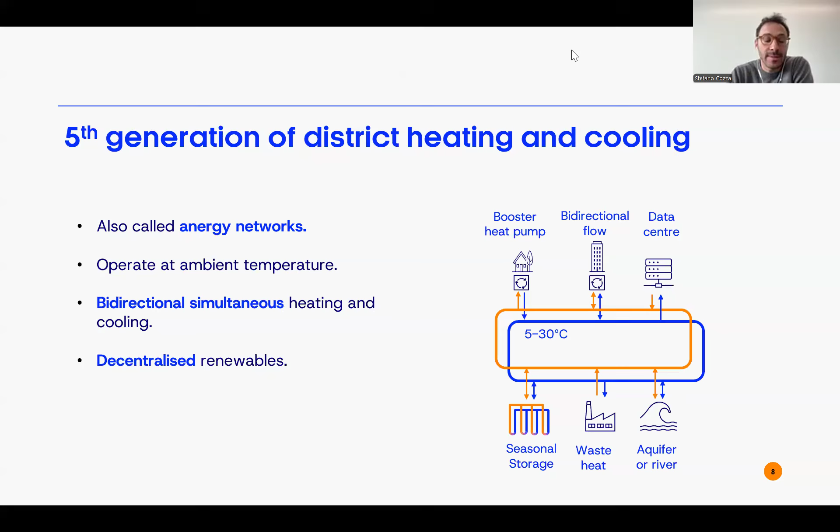anergy networks or low temperature networks that can work at ambient temperature, can provide heating and cooling, can use different amounts of renewable resources with seasonal storage, waste heat, water, data centers, really integrating different solutions to provide heating and cooling to the buildings. And this is a solution that we see developing very fast, or at least a bit faster than, let's say, classic big district heating projects.

This is because these networks are a bit smaller and give the possibility to really use local energy resources that are specific to every place. And they can connect fewer buildings, so they are able to overcome a lot of the classic problems we have with big district heating projects in cities, in which we need to close many streets, connect many buildings, and need a lot of financing to make it work. So it's really a solution that can work and is working very well for many European cases.

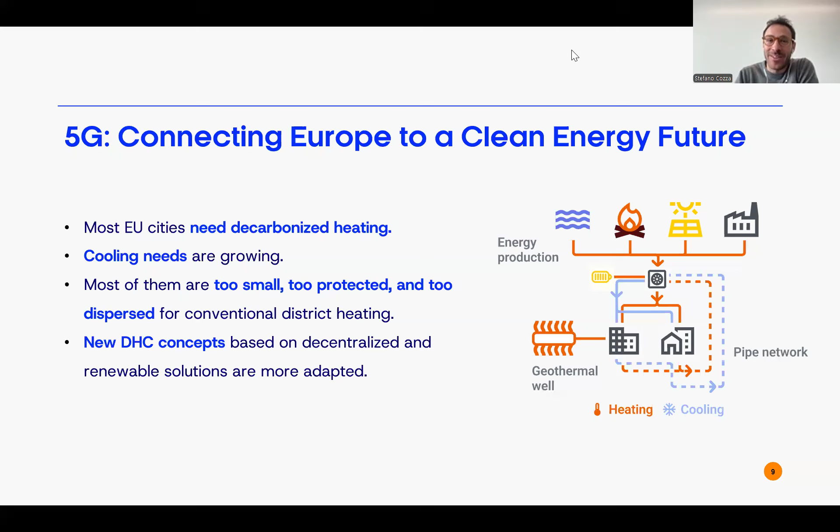So it's a solution that seems the dream one and that could be deployed very easily and very quickly. But of course, it also comes with many challenges: with all this increasing efficiency and more renewables, the more complex the networks are, the higher the challenges. So we need to better identify the building demand. We need to better identify the supply. Renewables, as we know, are not always available. Buildings are all different. So all this comes with a lot of challenges that can be partially overcome with software and digitalization.

So the focus of our work is really to bring digital tools and digital solutions to overcome many of the technical challenges engineers and planners are facing when designing district heating networks. And this is also why we developed, as Ivan was saying in the introduction, our software TESSA, the Thermal Energy System Simulation Assistant. TESSA is a software that we started developing almost 10 years ago at the University of Geneva with my two co-founders and colleagues, Jonathan and Xian.

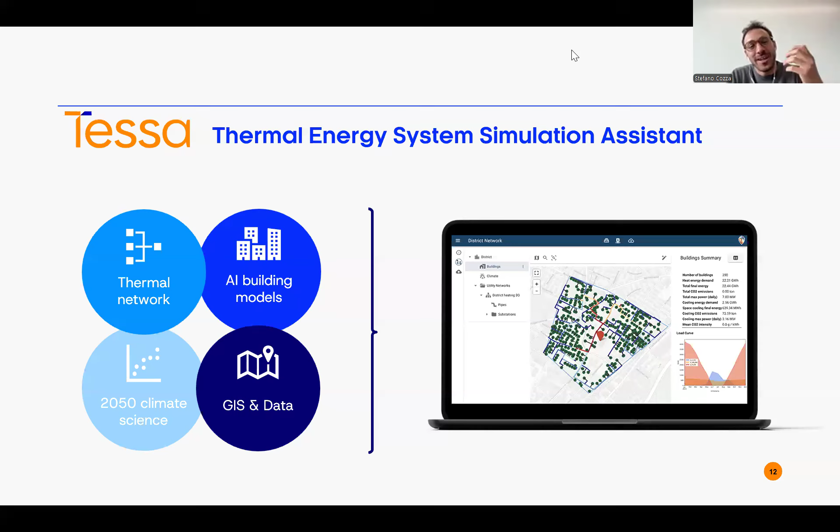We were all working on different topics of energy efficiency. We were working on thermal networks with algorithms to cluster the buildings. We were working on energy models. We were working on climate science and climate scenarios, because we are building networks now that are going to provide energy for the next 50 years, and the climate is changing. So we need to take this into account. And we basically brought all this into a software easy to use for engineers, to bring all these years of science and research into the industry and give them the tools they need when planning district heating.

And these are all the things that today we can cover with digital solutions, and many of these steps are still done with Excel, even with PDFs or manual inspection: starting from the demand, so how much the buildings are consuming; source identification, so where is the heating and cooling we can provide to our buildings; the design of the system, so the pipes, where these pipes are passing, the streets, how to connect the heating to the building; simulation of the system; and finally economic assessment, because in district heating the CAPEX and the return on investment of a network is really the main challenge, and what is probably blocking most projects today.

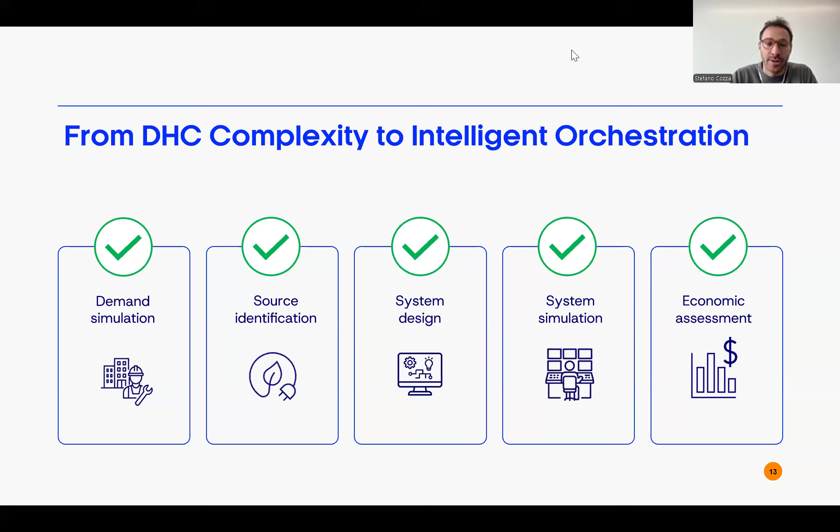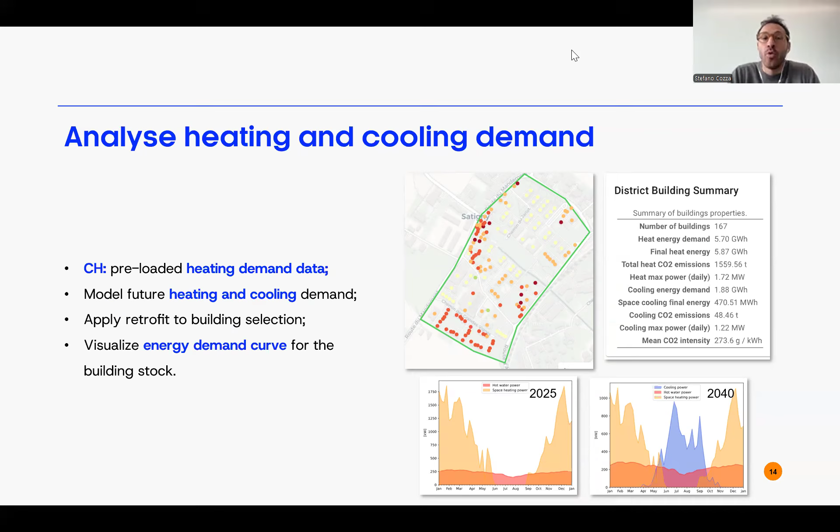So we cover all these aspects in one place, in one SaaS, one software that is easy to use, starting with analyzing the heating and cooling demand, for which we have data already available for today's climate scenario and future scenarios. I'll present a little case study later with the increased demand for cooling. So how to take into account in a network of today the new cooling needs we will have in Europe.

Generation of the district heating network: automatically generate the network, see which are the optimal routes and connections between one heat source and multiple buildings, and dimension everything you need with it, energy storage, sizing the pipes, calculating the pressure, sizing the pumps, really everything that you need at the design level.

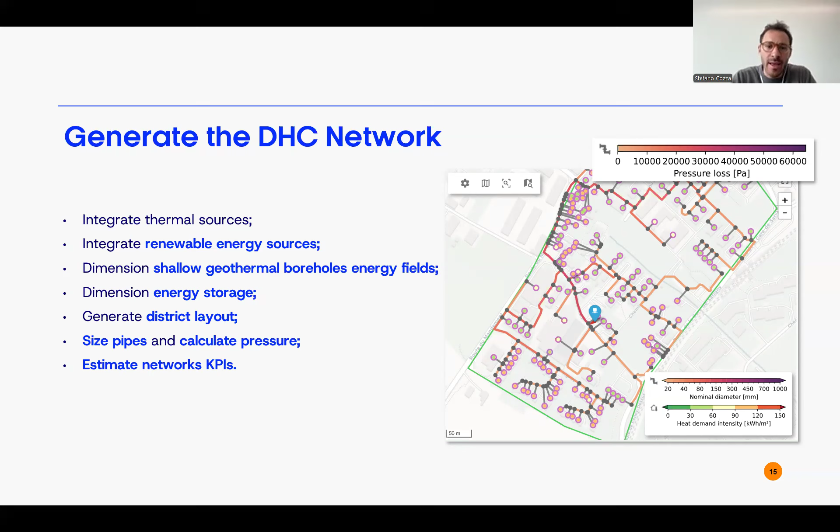And then also, of course, generate the output of this analysis, generate scenarios that can quickly be compared and have the most important KPIs for each of these projects, as energy savings, CO2 savings, capex, and so on, and be able to really compare very quickly different scenarios and be able to decide which of the design scenarios is more suitable to a certain project or a certain place.

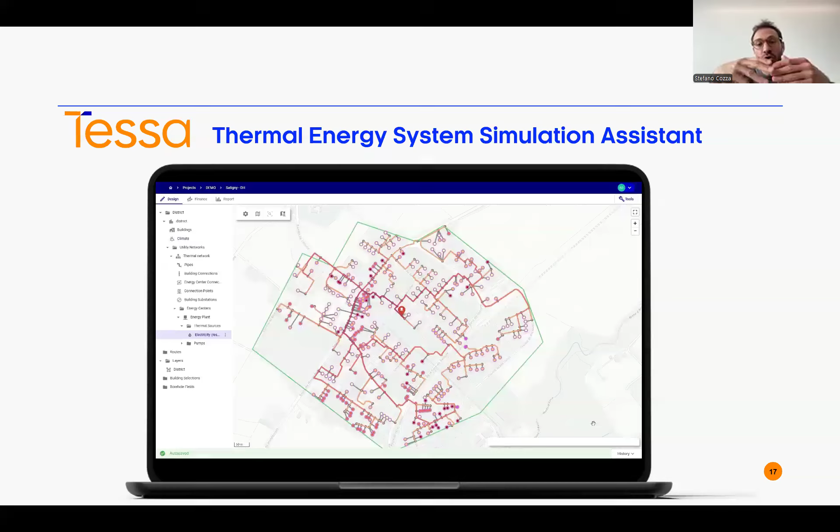Here I have a little demo that I did this morning, a recording of a case here in Geneva, to really show you a bit in action how far, let's say, we can go today with digital tools when designing networks. So this is an area close to Geneva, Satigny, a village that we can see from my window now. We can really select an area and quickly see all the buildings that are in this area, generate a network that connects all these buildings, and quickly generate a scenario

in which we can see what the district is today and how it is going to look once we connect all these buildings to district heating, in which we can decide very easily the heat source that we want to use, or multiple heat sources. We can start to play, remove buildings, add buildings, make scenarios, make hypotheses. But all this allows us to very quickly arrive at this kind of result, in which we can really see what is the cost of the kilowatt hour, the total investment, and a breakdown of the different items.

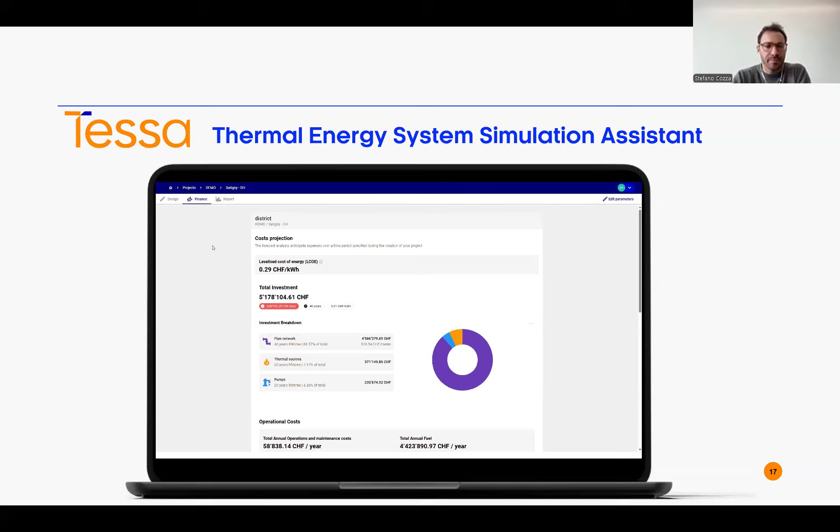I would like to present you a case study, a project that we did recently, that has been awarded here in Switzerland with the Infrawatt award, that is really on innovation and replicability. So I think the added value of these new smaller 5G networks is how we can replicate them and scale them. This has been so far a bit the problem of district heating. Each project was a standalone project, very big, very unique, and despite learning a lot of lessons, every project was very different, very difficult to make of this an industry that could really scale and be replicated.

With 5G, it is instead really going in the direction of a technology that is really turnkey. You can really start from the beginning to the end and have something that is replicable in different places. So I decided to show you this case, because I think it's something that would speak to a lot of you. The case was a typical Swiss village, that is not only a Swiss village, but could be a typical European village. So 67 buildings, all with 90% fossil fuel. There were just like 2-3 heat pumps here and there, most of it oil and gas, very dense with very few streets,

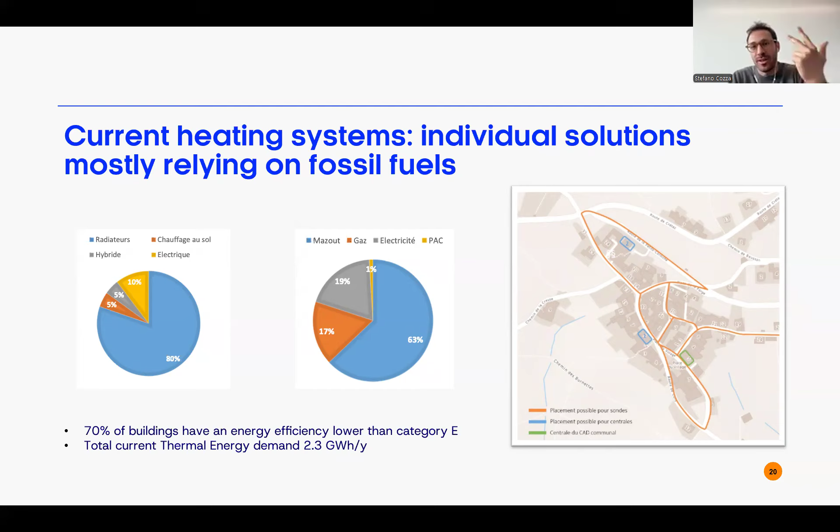impossible to put a heat pump everywhere. They explored different solutions to decarbonize heating and cooling. It is a protected area because it's a village that is UNESCO heritage, so also very complicated to change the buildings. And a context like this was heavily on fossil fuel, with a very low energy efficiency label for each building. So old buildings, inefficient, with fossil fuel, a classic.

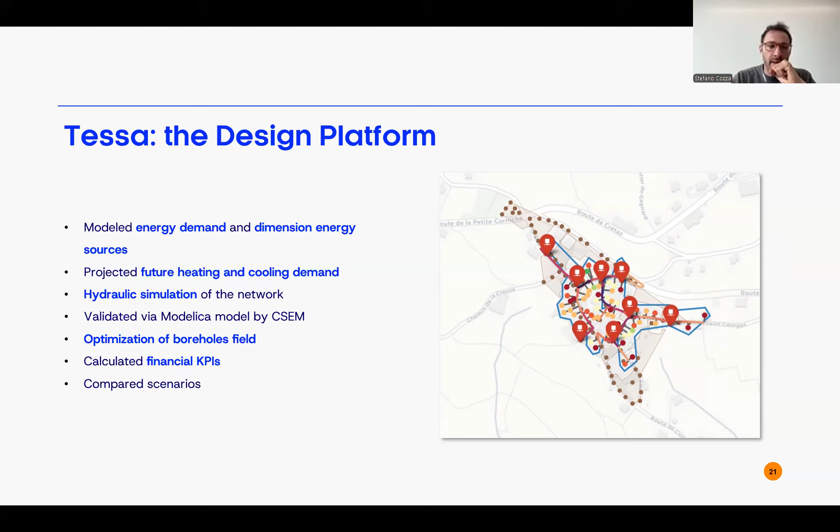And in this case, the engineer that worked on this case was able to use our software to really come up with an innovative solution to use all the possible energy sources they had in the village. So really extracting heat from the parking, a little river, ground source heat pumps, geothermal probes. So to really be able to use different sources all at the same time, all in a network that with low temperature was able to provide heating and cooling. And taking into account also climate change.

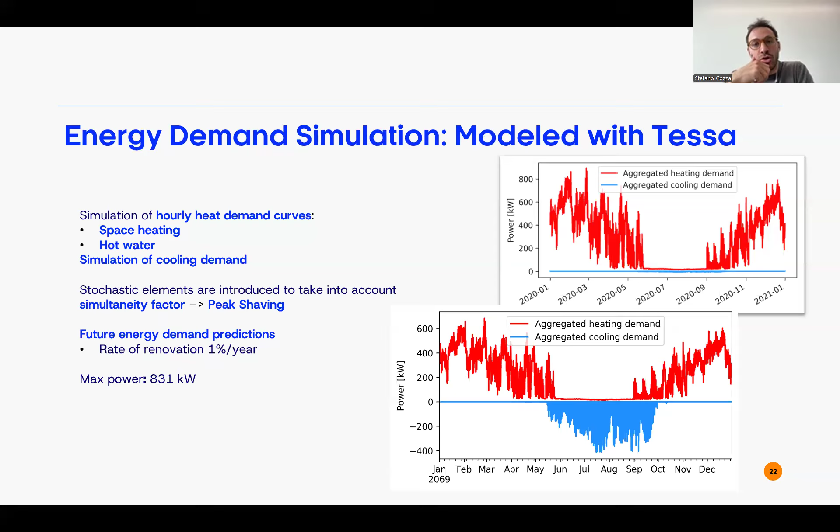So this village, actually all the area of Lake Léman here in Switzerland, is really affected, like many other places in Europe, by heat waves and how much the climate is changing. So the need for cooling is really growing very quickly. And he was able to simulate and show what this demand for cooling is going to look like in the next 40, 50 years, and show also how the renovation rate of the buildings is going to count in this new network. So a really, really advanced tool for this case.

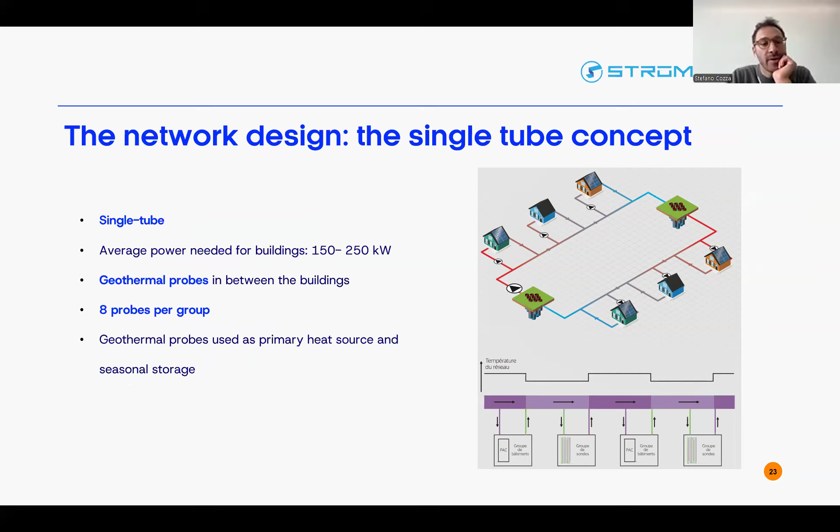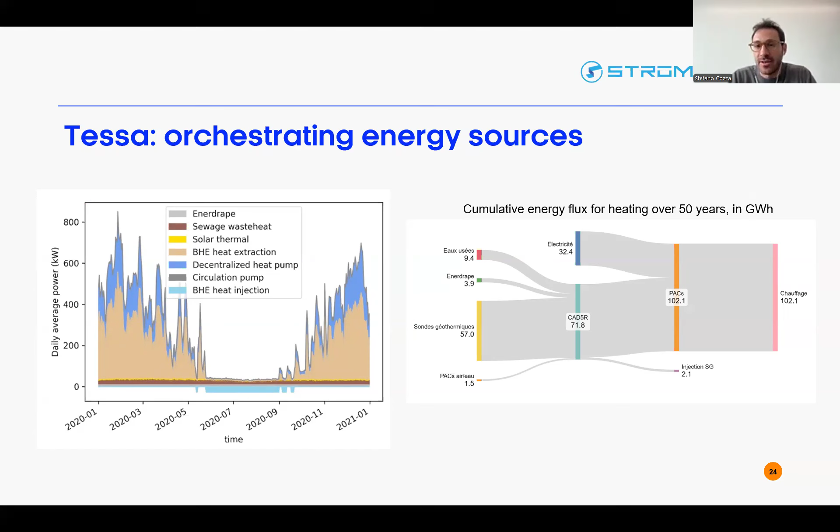At the end, the solution they decided to go for was a single tube concept, really for heating and cooling, with geothermal probes for thermal storage, also for seasonal thermal storage, so between summer and winter. And thanks to our software, they were able to use all these different heat sources that you see. So there were heat pumps, heat they were able to recover from the water, heat coming from the parking, solar thermal. So in total very different sources, all used to provide 100% renewable energy to this village.

Of course, this comes with a lot of operational advantages in terms of efficiency, in terms of reducing pumping power. So all the, let's say, good perks of this kind of solution, 5G.

But not only operational, technical and design advantages that we like a lot as engineers, but these translated to real savings, reducing the capex, in this case only for the boreholes, by almost 50%, with 450,000 CHF in capex savings that for a project like this really made the difference between doing or not doing these projects, with a reduction of the cost of the kilowatt hour, a reduction of cost in the piping, and a reduction in the operational cost.

So thanks to this optimization, thanks to the possibility of having, very early on in the design phase, a clear view and understanding of the design choice and of the cost, we're able to really move and steer the project through realization, while most of the time what we saw is that in the design phase, when we are not able to make the right choice to reduce the cost, the projects get stuck and cannot be realized.

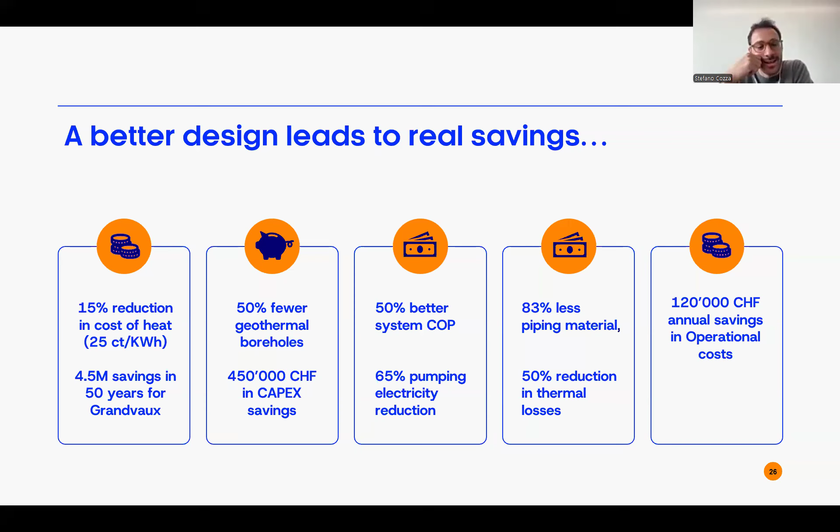So yeah, that's why we are really hammering and focusing on this 5G solution. We're now adding a lot of features to the software itself, but also a lot of know-how on this solution, because we really think it's something that can push forward the development of district heating, giving planners the tools they need to make these more complex projects.

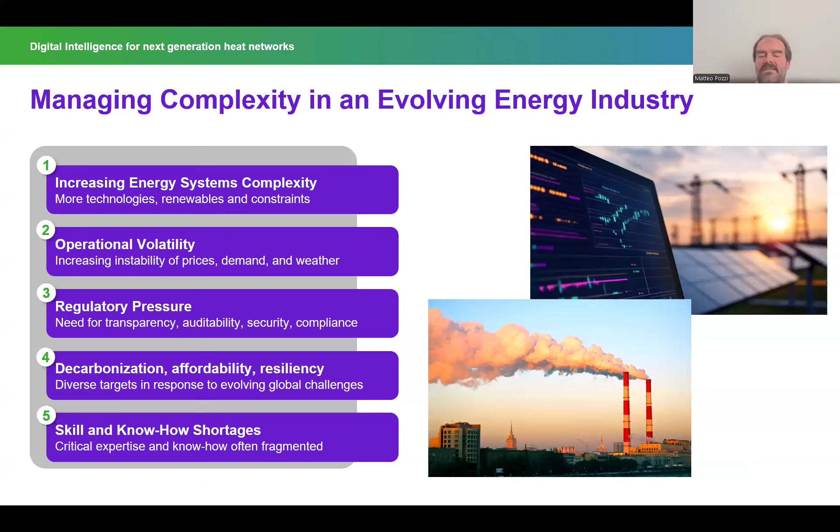I would finally say that one of the other challenges is the lack of skills. Complexity comes with the need to be able to master a diverse range of skills that all coincide in the time of decision. And being able to manage this in times of generational takeover, or just the need to bring more people on board because of the sheer growth of the size of systems, that is a challenge in itself.

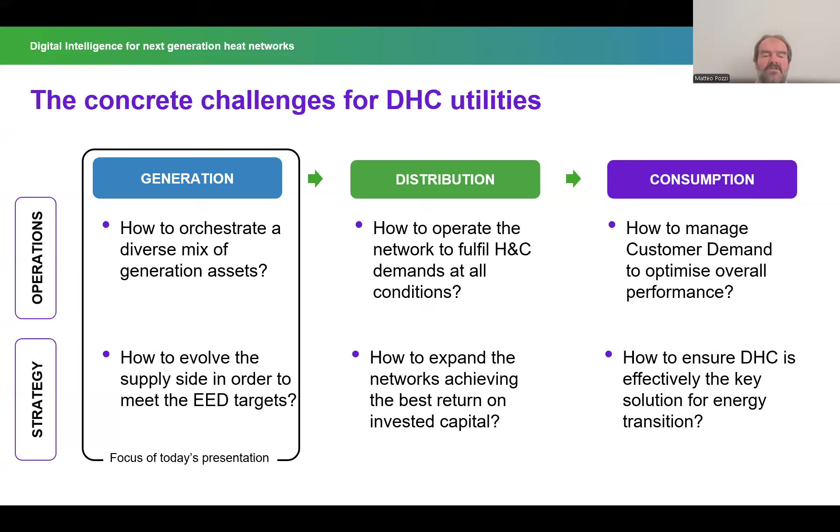And this transforms into a range of very practical questions for district heating and cooling managers across the whole value chain. Since Stefano, I think, already provided a fairly good overview of what happens at managing demand and distribution networks, I will concentrate my speech on the generation side, both at operational and strategic level, which basically is how to manage all my assets and how to evolve my asset supply mix in order to meet my objectives, which pragmatically coincide with the energy efficiency directive targets, or more simply the quest for better use of local resources to decrease my exposure to global factors and uncontrolled costs.

So we're speaking of a solution which looks very much at fourth generation rather than fifth generation, even though the concepts are general to any complex system where a diverse mix of generation assets contribute to the satisfaction of supply. I'm particularly keen on saying that we are looking more at fourth generation because normally the big advantages and the big challenges happen when dimension and scale is actually large. And in these cases, it becomes very apparent, and I would say almost a no-brainer, to understand why digital solutions and decision support systems can actually help a lot.

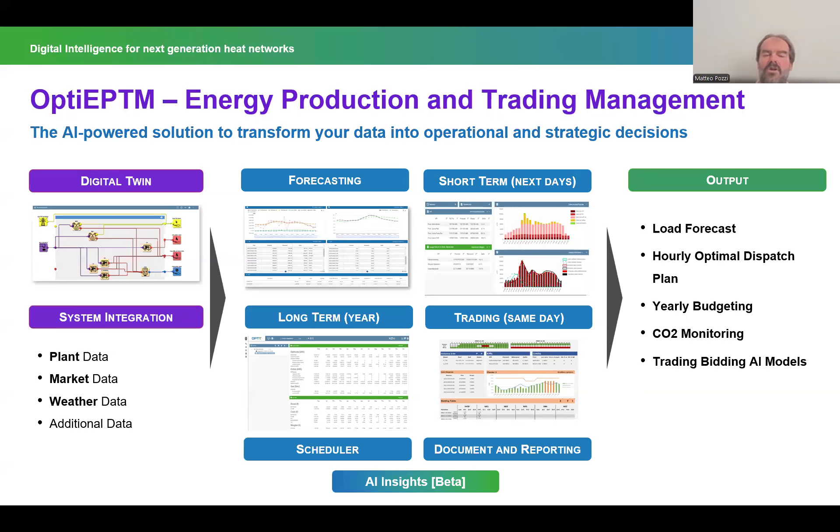This slide is actually just a summary for what I'm going to be showing in more detail. So let me go straight into the details. The core of a digital tool for generation orchestration is very much the capacity to map all the assets, taking into account that assets are connected through physical and logical interdependencies. There may be heat that flows from a CHP and goes into an absorption chiller, which may not be linked to other heat sources.

Of course, the capacity to capture the technical and economic behaviors of each single asset in the plant is crucial. And this needs to be linked with the fuels and all the inputs in terms of energy or resources that get transformed in the assets, down to the final demand, which of course is heat and can be a general demand for heat, but also different kinds of heat. We have systems where we actually look at heat at different pressures and temperatures, etc. We have electricity, because normally we will be supplying electricity to a number of dedicated customers, but we will be able to interact with the market, and of course chill whenever there is the cooling factor in the room.

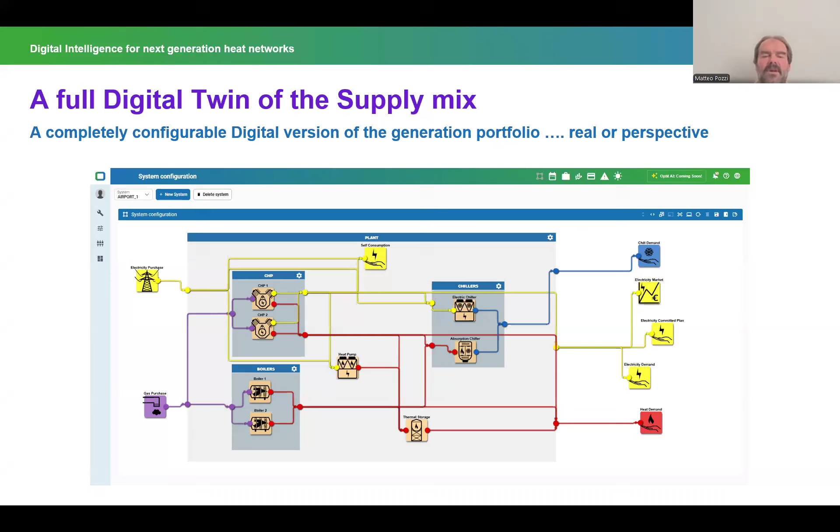So once the system is there, the first requirement to actually meet demand is to estimate demand. We developed a module within the application that looks at past data, weather forecasts, and additional demand drivers in order to estimate demand. This is actually something that normally large companies already have. We don't mind that at all. We can integrate demand forecasting with any third-party tool. Sometimes we are actually asked to compare the forecast that we generate with the forecast from third parties and eventually construct potentially sophisticated ways of having these models compete or collaborate. But we can also just adopt the demand from third parties if there is a trusted source which the company is feeling comfortable with.

And this will lead us to the core of the system, which is being able to optimize hour by hour, and today I would say quarter of an hour by quarter of an hour, demand and supply, understanding how the different assets actually need to contribute.

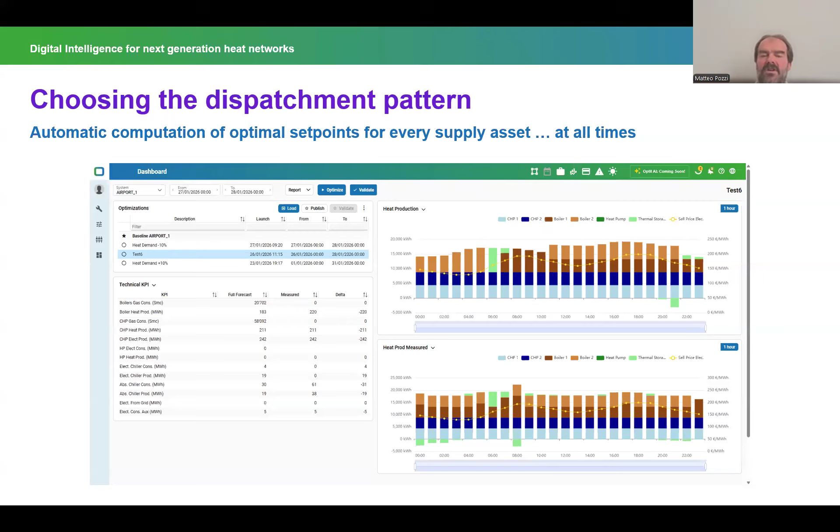But then, of course, things happen also on shorter or longer timescales, because in fact, very often short-term decisions need to take into account how the plant is going to be running throughout the whole year, which is why we developed models that look at optimizing the whole year in order to budget and define the operating strategies with different sources, take into account annual constraints, and take into account long-term assets like seasonal storages.

And interestingly, the long-term module has now become the core of more strategic decision making, be it evaluating the impacts of disruptions in terms of price changes, cost, demand disruptions, or just understanding what is the impact of new assets in the system.

Looking at the whole year with a good level of granularity and diverse behaviors will help you understand how the introduction of, for instance, storage units or heat pumps will actually work across the high season, middle season, and low season. Most likely throughout the years, the typical variations where peaks in prices or demand can be taken into account. And of course, if they are not in the past data, they can be simulated in synthetic data.

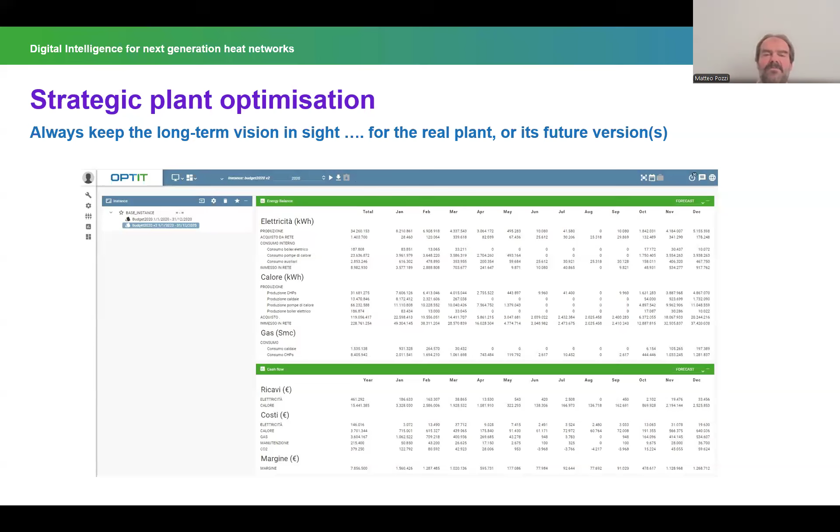In essence, having a long-term module that looks at how the plant is going to be working in a given situation is the perfect element to design long-term retrofitting or investment strategies. But, as I said, decisions also go back to not only planning for the next day, but also understanding how to manage the same day.

And this goes very much in line with the capacity of, and this again is why we like to deal with companies that have a bit of structure. If there is a trading department, what we've seen already and what we've been doing with some utilities is to have their trading department look at a district heating system and a portfolio of district heating systems as a provider of flexibility. Look at how the markets are going, understand what is the marginal cost of increasing or decreasing electricity throughput by changing the dispatch pattern, and therefore be able to get extra margins

on the volatile markets, transforming an obvious difficulty and an obvious risk for the company into an opportunity to actually be even stronger on the market. And I think this is the real meaning of sector integration, as we see district heating and cooling being a core for the coupling between markets, which actually is a reality today already.

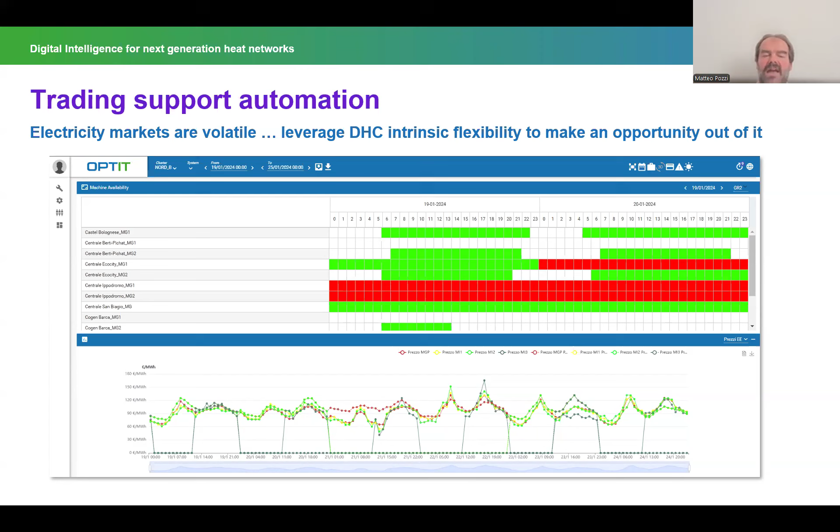The last addition, which I'm glad to talk about: you will have seen that there are a number of different analytics approaches behind this, typical model-based optimization, forecasting and data-driven approaches. In fact, the calibration of the plants can use hybrid approaches where data coming from the field and model-based approaches are combined together in order to give the best throughput.

In fact, there is also some generative AI and LLM that we are now using to help users understand the suggestions by the system, being able to interact with a machine that interprets the logs of the optimization models and tells you why the optimal or suggested path is in a certain situation, which may be the explanation of constraints on operations or particular pressure on costs, etc., which makes the solution more transparent for end users to comply with. This is because, of course, the capacity of people to interact with the machine is crucial.

In fact, our solution, which stands for Energy Production and Trading Management, interacts with and picks up the data that are normally managed by the company itself, generated by the assets, generated by the markets, provided by weather forecast providers, and can get data or feed data back into monitoring systems. The crucial point is to sit on top of the digitalization stack in order to support decision making and hopefully make it as seamless and as comfortable as possible. This actually does happen.

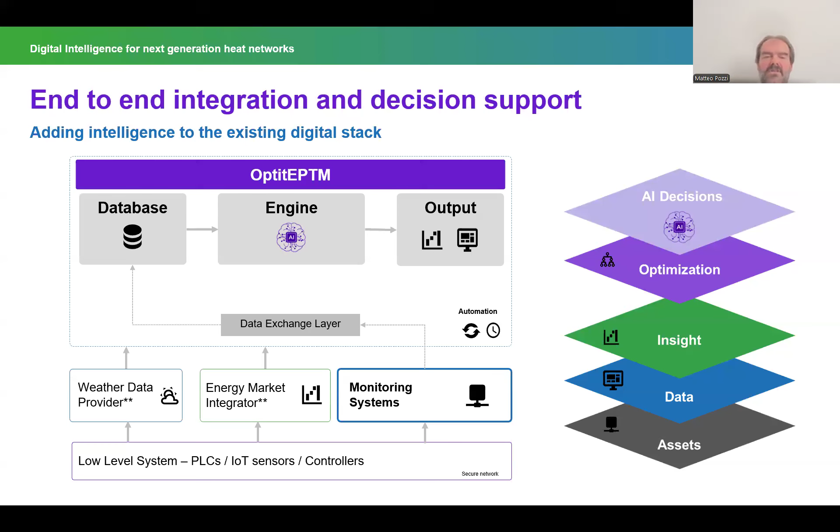In terms of the capacity to really make complex workflows automatic. Nevertheless, I will never stress enough the concept that our tool is a decision support system, meaning it doesn't aim to substitute human intelligence, which will always be there. There will always be human supervision, even though once you understand that your supervision doesn't require your action, maybe we are actually looking at a closed loop AI-driven system.

Let me just say that another investment that we are doing is to increase the capacity to look at creating a digital decarbonization and digital evolution pathway, which looks very much at the multi-energy perspective. We've come across, whenever the scale becomes big, the need to actually look at the DH heating and DC cooling systems as a center between electric systems infrastructure, which may impose limits on the capacity to actually have access to electricity. There may be bottlenecks in the electric systems that you need to take care about.

Heat demand is always very local, and investment costs may need to take into account not only the DH heating and cooling system, but also the potential impacts on other commodities, most likely the energy infrastructure, the electric infrastructure. So starting with projects that look at this problem at very, very high scale, we are now bringing everything together to really have investment planning in a single place, which started from operational, but now is becoming very much strategic in terms of outlook.

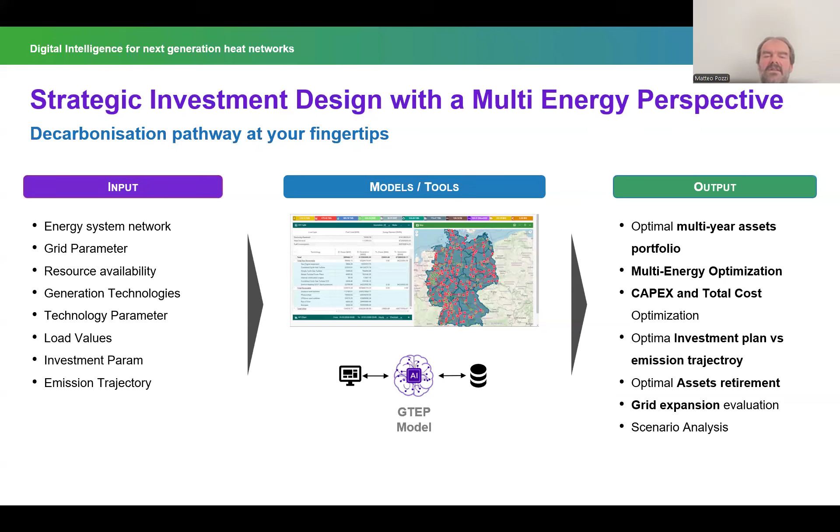And this is just to say that everything I've said has been in operation for maybe 15 years in leading utilities in Italy. And I would also say that the solution has evolved as the needs were increasing, coming to the very advanced sector integration examples that I showed before.

Nice thing is that energy orchestration is not only for DH heating and cooling. It applies to other large energy-intensive facilities. We have an example that we always like to mention, which is airports. The Malpensa Airport Energy Center implemented our tool with minimal changes in a matter of a few weeks, and we are very happy with how things are working.

As I mentioned before, we are present in the US, and we are actually using these kinds of approaches and tools in order to help the local multi-utility company, Con Edison, understand really how to engage in decarbonization and the construction of a more sustainable New York City in the years to come, which is nice to know since we see all the geopolitical and grand scale.

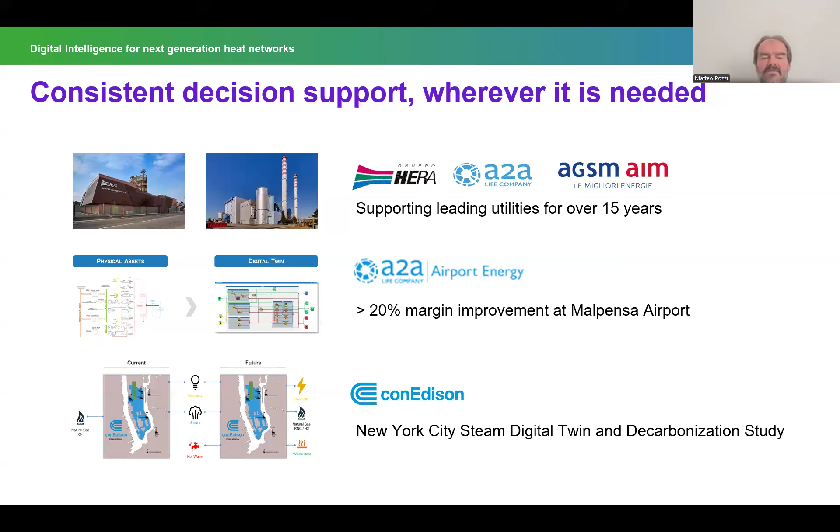Nevertheless, things are happening, trying to modernize one of the oldest systems in the world, first pipes being laid down in 1882, which is almost 150 years from today. That system is now trying to change its skin in face of the new challenges of modernity.

Last remark. Everything I've said may seem complex. It is. There is a lot of complexity, but this complexity is in a way accounted for in the tool itself. So it's a matter of a few weeks to really understand if and how these approaches can work in your case, which is what we normally have as impact evaluation, proof of concept, typical kinds of projects. And once you've decided, actually starting the optimization of your supply mix can be again a matter of a few weeks.

So it's always a matter for us to understand what are the barriers to taking this into account. I would say excuses are very, very little because these tools are very much there for you to be supported. So we'll be very happy to eventually deep dive into this with your systems.